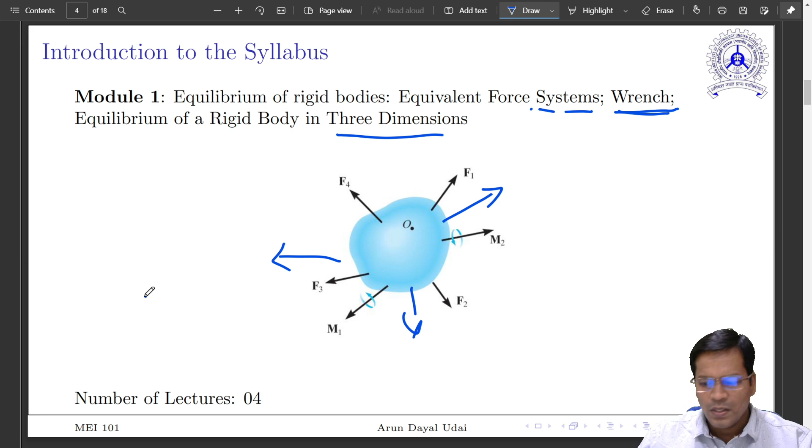Next big thing will be your analysis of structures, that is truss, frames, and machines. We'll discuss what is truss, what is the difference between frames, how it is different from machines, and see examples of all these. We'll also do some numericals on different types of trusses, frames, and machines.

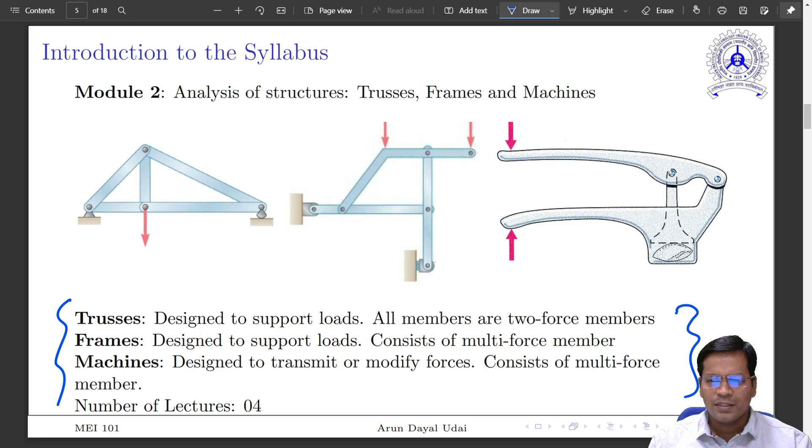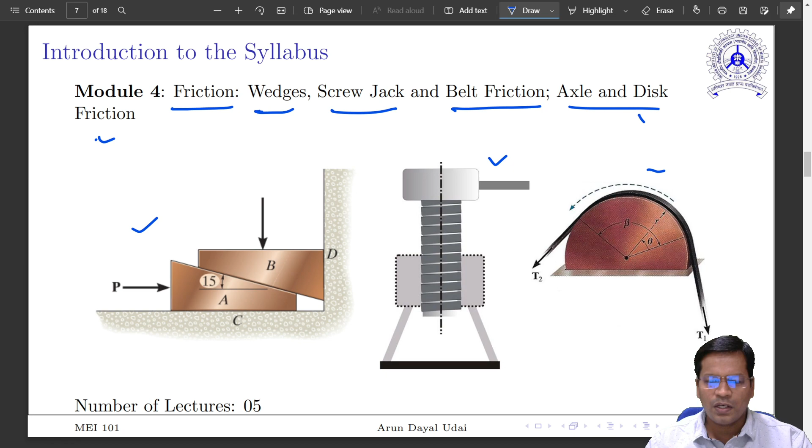Now moving to the fourth module, we'll be working on friction, different types of friction on wedges, screw jacks, and belt friction. Axle and disc friction is also there, and we'll do some numericals using this, covering the whole module in 5 lectures. These are some demonstration images showing it can be in different configurations, not necessarily just this one.

Next is distributed forces, which lays the foundation of dynamics. So far it was statics, and we'll define statics and dynamics more formally when we start the syllabus. You get to know what is moment of inertia, which you already know a bit, but now we'll deal with it differently, as a tensor, no longer a scalar quantity. Few of you may know it, but we'll formally define and find the moment of inertia of different shapes.

Centroid of lines, areas, composite plates - basically centroid is the big part. Next is center of gravity; both are different, and these are the two major domains covered in this syllabus. Product of inertia is also there, apart from standard moment of inertia, which is something new you'll probably be learning here.

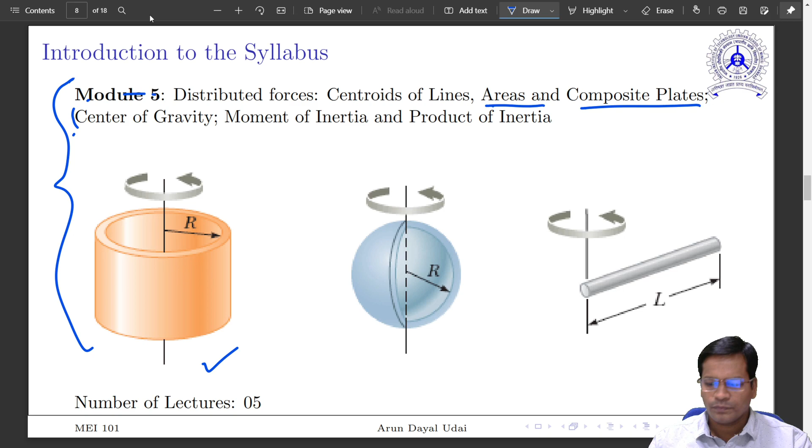Moving next, method of virtual work to get the forces, stability and equilibrium will also be dealt with here. Hopefully you have used the method of virtual work a bit to solve mechanics of pulleys; here we'll extend it to solve machines, frames, and many others. The number of lectures is little less, just 3, so 3 plus 1 tutorial.

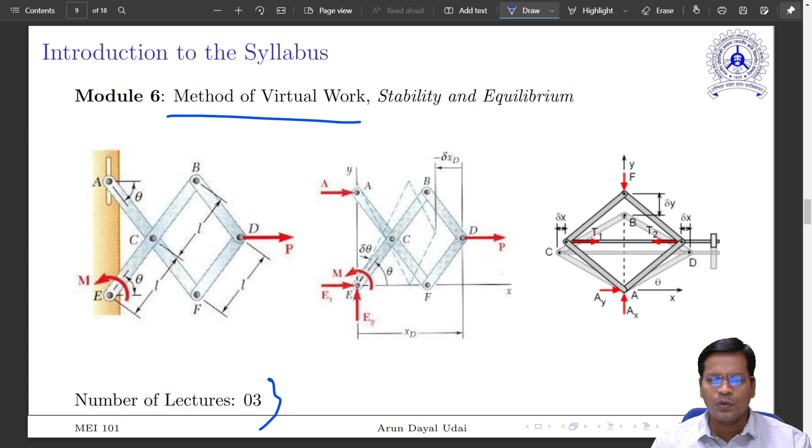Next, from here it is no more statics, it is kinematics. What is kinematics as such? It is mostly oriented towards the mathematical portion of physics, dealing with trajectory without knowing the cause of what is causing that motion. In kinematics we are mostly concerned with geometry, topology, and their differential relations, like trajectory - these will be dealt with in detail. Kinematics is a huge portion dealing with this.

Without knowing the cause of motion, we study the motion, or if it is statically at rest, we study that too. But static forces and all will be part of statics. Motion relative to a frame, tangential and normal components, radial and transverse components - there are different approaches to solve similar problems. This has only 3 lectures plus 1 tutorial. If you have the syllabus, I will share it today itself through Google Groups.

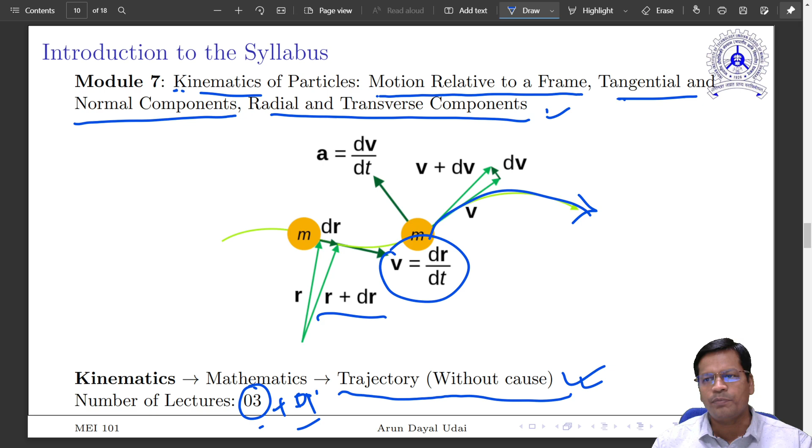So 3 plus 1, if it's mentioned 39 lectures for theory, every week you also have one tutorial, so it will add up to around 52 lectures. Combined theory and practical tutorial, total 52 classes this semester for this subject. Got it? Next part of the module will be kinetics, not kinematics.

It's again a huge portion of physics. Causes of motion is studied. We'll cover rate of change of angular momentum, impulse equation of motion in terms of radial and transverse components, work-energy approach also will do similar things. 3 classes for this, plus 1 for tutorial. This is known as kinetics.

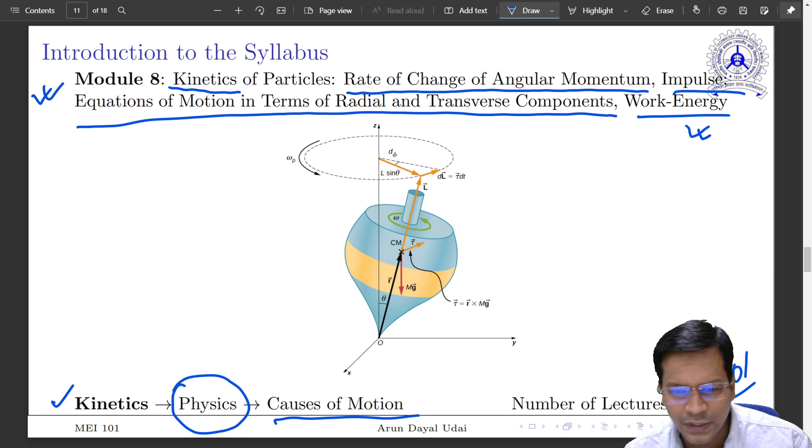Coming to next, you have kinematics of rigid bodies. From module 8 onwards it is formally known as dynamics. Dynamics has 2 big regions, kinetics and kinematics. This one will be covered by Dr. Sikandar Azam. From here onwards he will take the class, and kinematics of rigid body is here.

Interconnected bodies which are there, you give motion, you have masses, you have cause to create that motion, and you are also analyzing forces. Everything will be combined together in this module. By the time you reach here, you should have background of all 8 modules, and this is a little difficult, so 7 lectures is assigned for this.

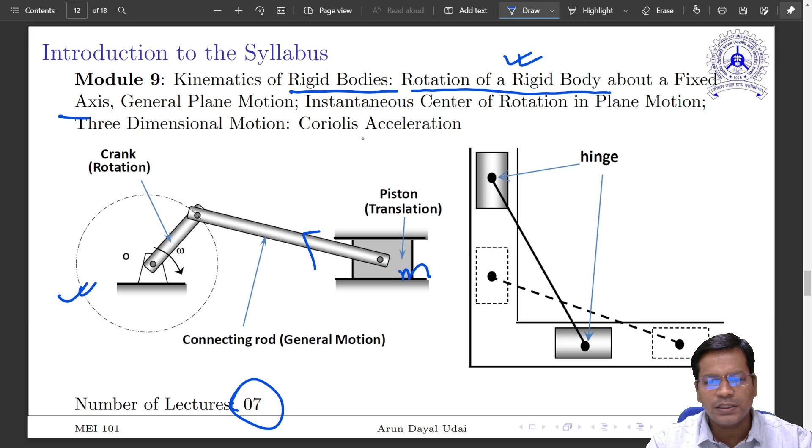It also has a rotation of rigid body portion, which is again very complex. You all already know this from when you appeared for JEE and others, about a fixed axis, and mind it, all this will be taught in a 3D system. So Coriolis component is also there, general plane motion is there, instantaneous center of rotation in plane motion is there, 3-dimensional motion is also there. So it's everything, the whole of engineering comes at this point.

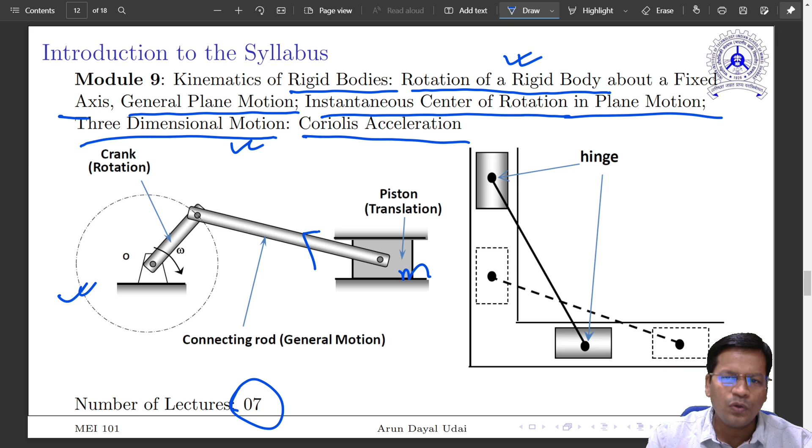This will be the last 7 to 10 lectures of your class, and with this, the whole of engineering mechanics will be finished. At the end you have 2 additional modules for real life applications, taught through case studies, computer coding, or simulation.

This is just a demonstration, a small replica picture from a MATLAB Simulink environment, where you can link different bodies together, study its motion, do some analysis, compare your results with the ready-made things in MATLAB or similar software. Hopefully with this we should complete the syllabus, or sometimes this can act as an additional thing you want to learn out of the rest of the 9 modules.

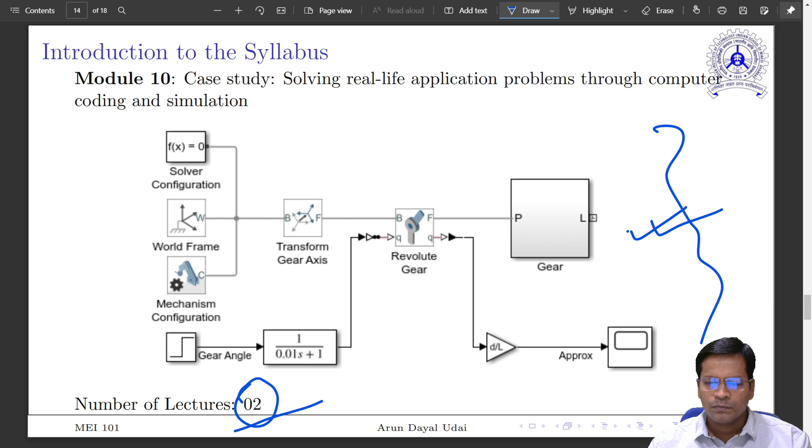I should tell you, yes, we have a subscription for MATLAB software, mostly useful for the last module, module 10, and it should be a great learning experience. Why? Going just by theory, doing some numericals, you won't distinguish your way of learning from the traditional way you have been learning so far.

So I would suggest doing some practical things. If possible, make some manipulator at home, create a 4-bar mechanism, create a 2-link mechanism, do something. If not possible in practical, you can do it on MATLAB, which we are subscribed to and you're given free access from the institute.

Now that you have your institute email ID, you can register yourself on this website. I'll share this slide immediately after class today. You can register using your IIT ISM email ID and start using it online, or download the whole software on your PC and start using it. That's the student version, and it works everywhere on this planet. Certified courses are also there, like the MATLAB on-ramp course.

That is for somebody who is new to MATLAB. This will kick start the programming thing in you. Quite a lot of you might have done programming as well, but this is a type of engineering programming language which I prefer personally to cover most of the examples in engineering mechanics, and at times in robotics also.

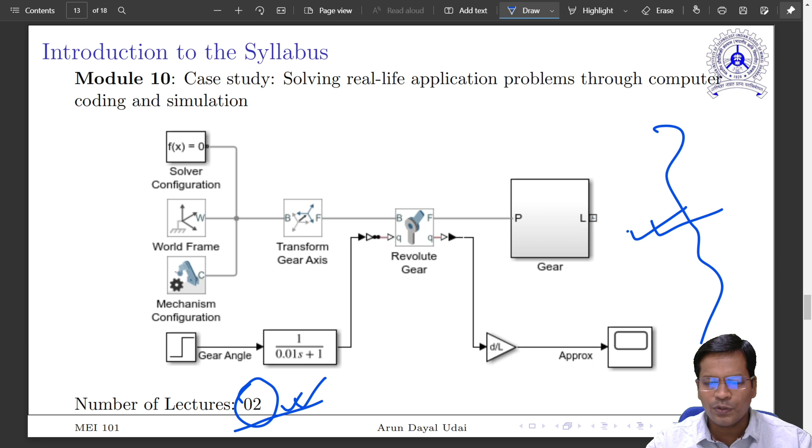This last two modules is everything. So what you do in the rest of the course is to prepare yourself to do this, to apply it. Without that, a course is incomplete. That is what I feel personally.

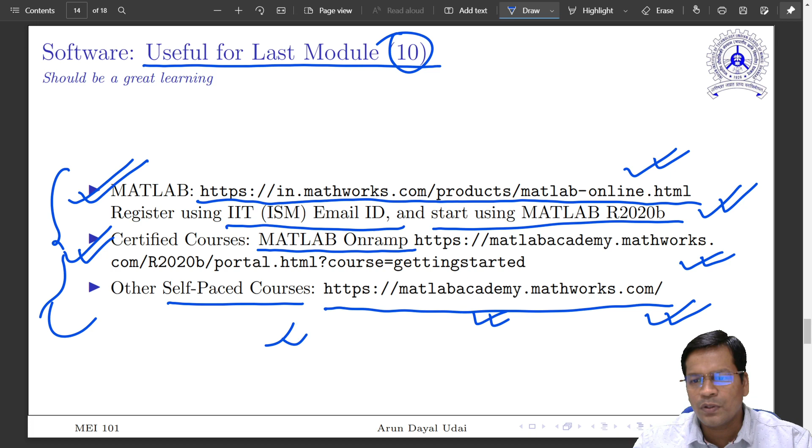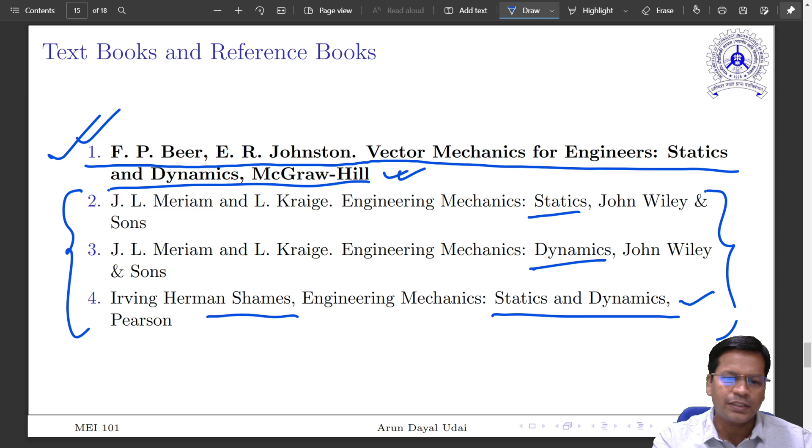It is always better if you follow the class well, be present in the class. Even though I share all the video lectures online, I would suggest you be in class, because in class you can raise your hand and ask your queries. So be in class, attendance is always compulsory. If at all it is a live class, online, at times we do take attendance. Anyway, these are the textbooks and reference books that I'll be following. That's all, I think.

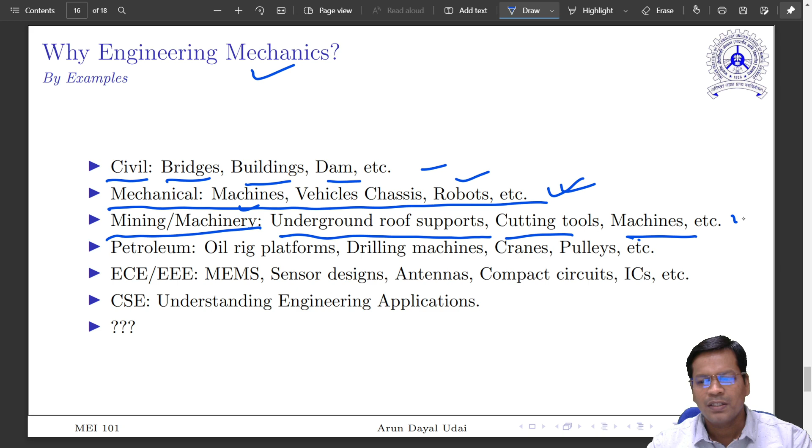And why mechanics? Ask yourself. If you have seen all my slides just now, you might have related yourself by seeing the pictures. Civil mechanics applies to civil engineering through bridges, dams, buildings, etc. Mechanical, obviously it is there everywhere - vehicle chassis, machines, robots, mining machinery, underground roof supports, cutting tools, machines. Petroleum engineering - oil rig platforms, drill machines, cranes, pulleys - so everywhere it applies.

ECE and triple E - micro electromechanical systems, sensor designs, antennas, compact circuits, ICs, everything. So it goes to each and every place. Computer science applies to all these too, because that is an applied science. Understanding engineering application is very important for them to apply computer science. Because this is an application, you have to be strong in all these. That is the reason engineering mechanics applies to all, and this is why it is suggested as a first year course. After that you will split into individual branches. That is the reason this course is there.

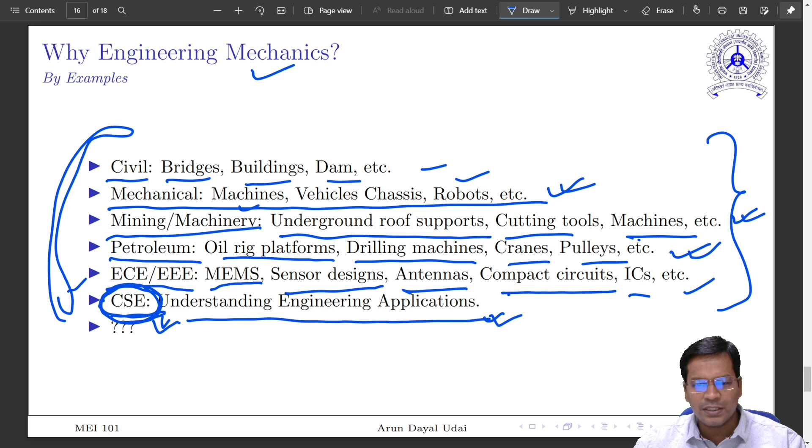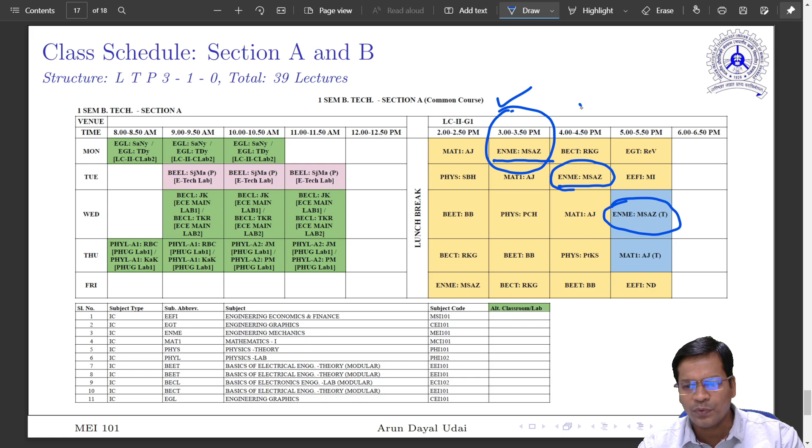And this is our availability. You already have gone through your routine - this is where we are. This is one, today's class. This is tomorrow's class. It is very easy to remember, I see it like a stair - it goes down, down, down. Today it is at 3, next day 4, next day 5. Easy to remember. And then you have a break, you don't have any class.

Coming back, you start immediately after lunch, so 2 o'clock, and then going back to 2 to 3, 3 to 4, 4 to 5, 5 to 6. So it is very easy to remember, and that is probably the reason they have put it like this. Engineering mechanics classes are always like this. So anyway, this is all about 39 lectures for theory, and the remaining lectures, about 13, are for tutorials. So total 52 lectures will be there this way.